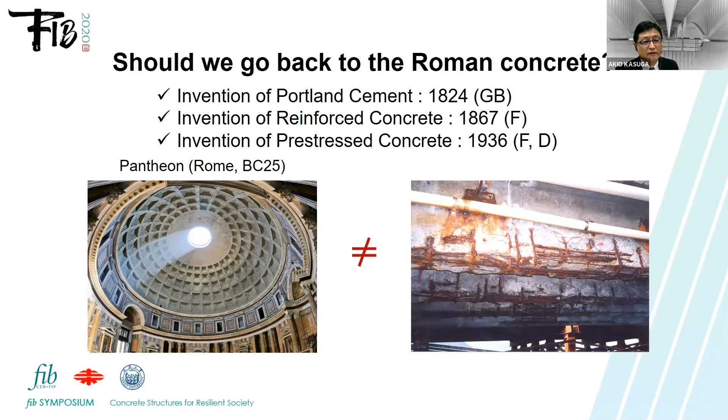So everybody knows what is different between the Roman Pantheon and present concrete structures. Roman concrete has no steel reinforcement, so the shape of the structure is only dome and arch. But about 150 years ago in France, reinforced concrete was invented, and around 85 years ago, prestressed concrete technology was invented too. But at the same time, we have the problem of deterioration of the steel reinforcement, like the photos on the right-hand side. So many engineers and researchers have been fighting this deterioration to solve the problem.

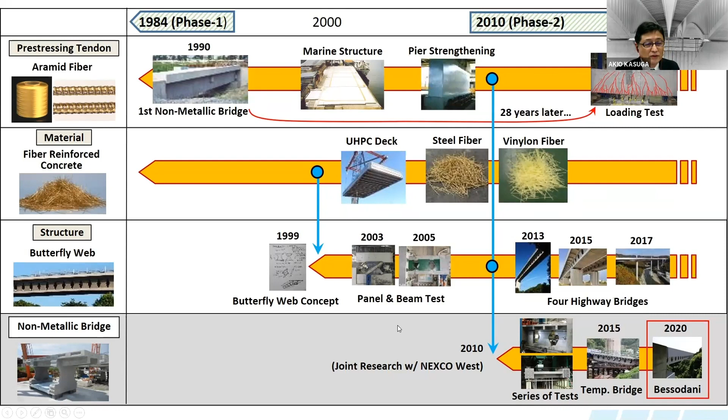So this is the roadmap of our long development of the non-metallic bridge. We first started at the end of the 80s, and at that time we developed non-metallic bridges for the Maglev train. We stopped during this area because of the cost, and also new technologies came, both materials and structures. Finally, now we have been doing joint research with the highway company.

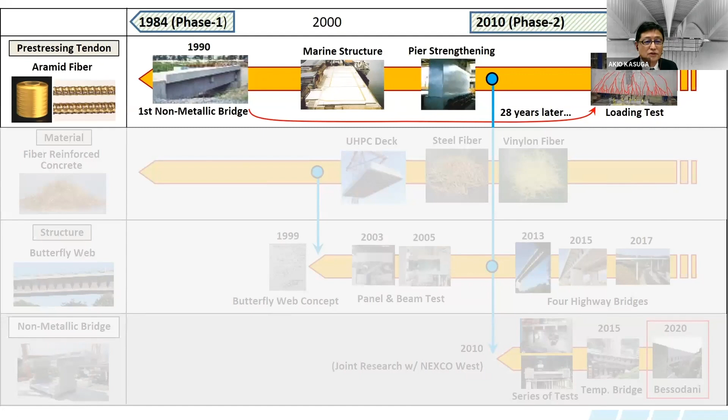So this is the first generation non-metallic bridge, from 1984. I call this the first generation. We built the private non-metallic bridge in 1990, and also used some aramid fiber in marine structures and pier strengthening. I'll show you later we just confirmed the strength of the 28-year-old structures.

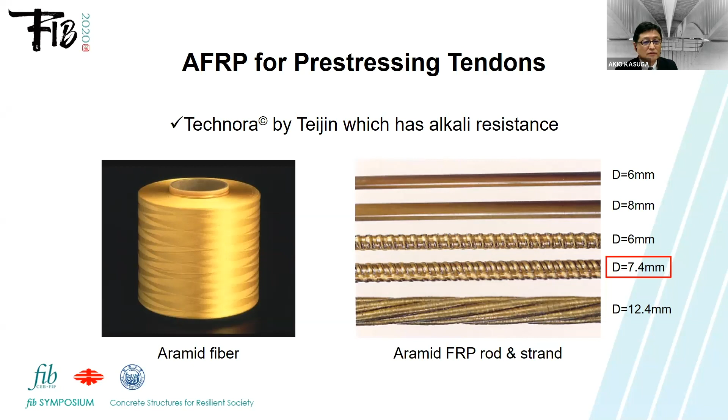As I said before, we focused on aramid fiber reinforcement as a prestressing tendon in the concrete. This is Technora by Teijin, a Japanese company, which has very strong alkali resistance. So we chose this material instead of carbon, since at that time carbon and aramid were available as new materials for concrete reinforcement.

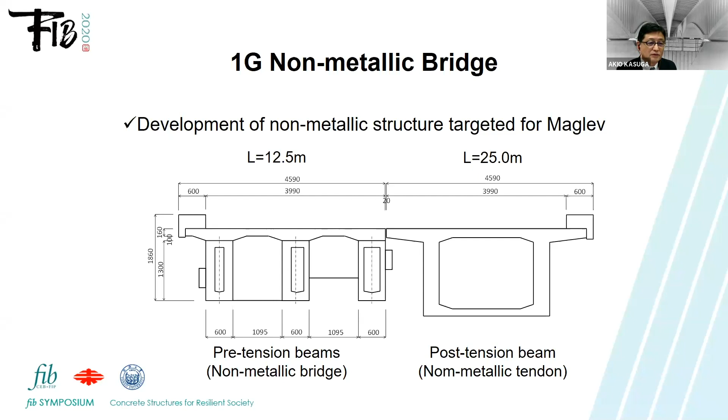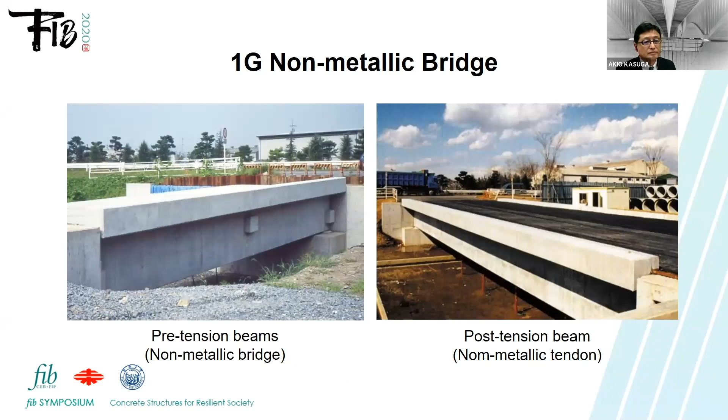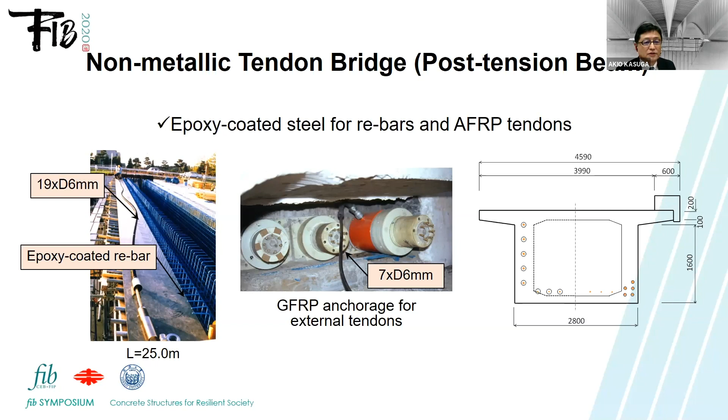For the pretension anchorage, we use a temporary steel anchorage system like this. It's very simple - we use a steel pipe, and inside the steel pipe we grouted non-shrink mortar to get bond stress for the aramid fiber reinforcement. But this is temporary, and we cannot use it multiple times - it's used only once.

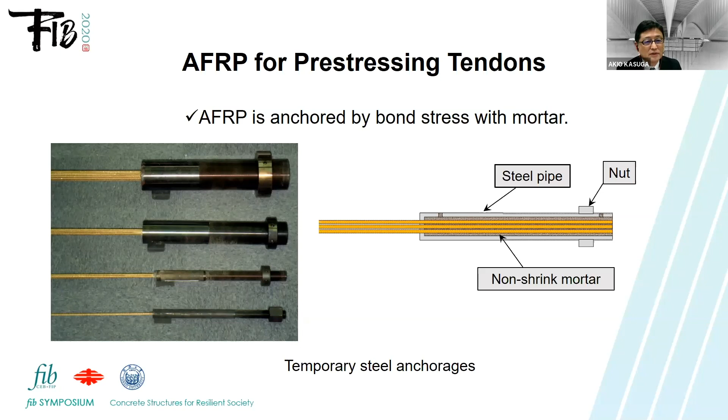The pretension beam is completely non-metallic. We use aramid fiber tendons, and at the same time aramid rebars, 8 millimeters longitudinally, with the same for stirrups. This aramid fiber reinforcement is very, very expensive because we have to bend it, and it also requires very special manufacturing before construction.

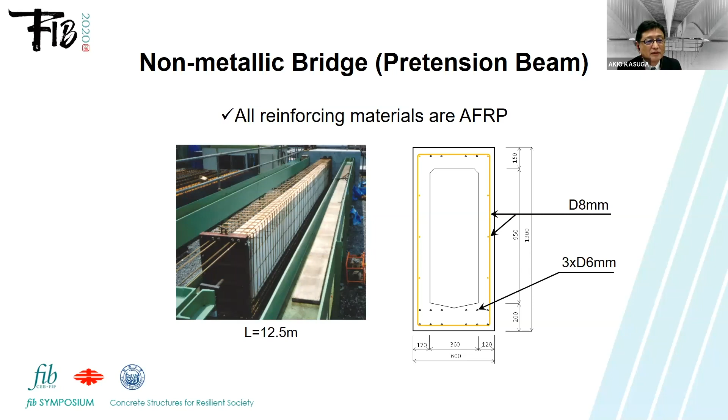At that time, the cost of these non-metallic technologies was 2.5 times the usual initial cost of prestressing beams. So we gave up continuing this first generation non-metallic bridge, and this project was suspended at that moment.

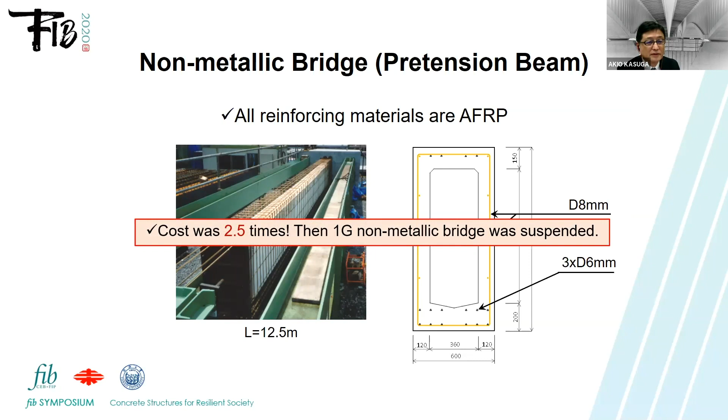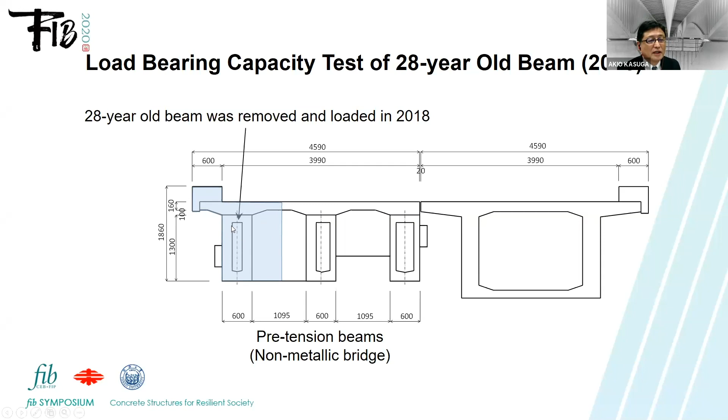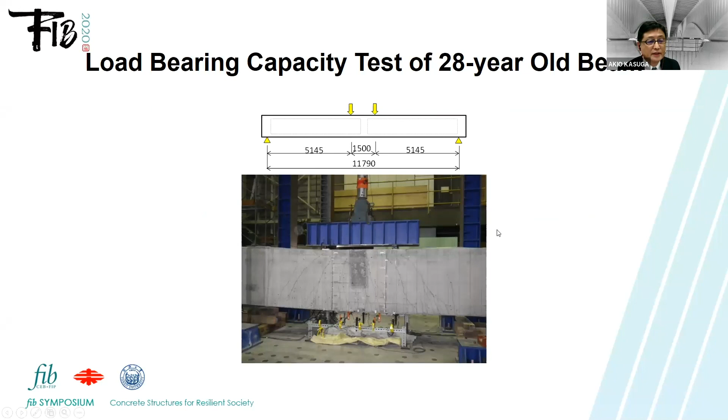So after the stories, in 2018, we cut one of the pretension beams on the left-hand side, this one. This is 28 years old. We confirmed the strength of this short beam in our laboratories with a very simple bending test, and confirmed that compared with the original design, the test results are almost the same, even though it is 28 years old.

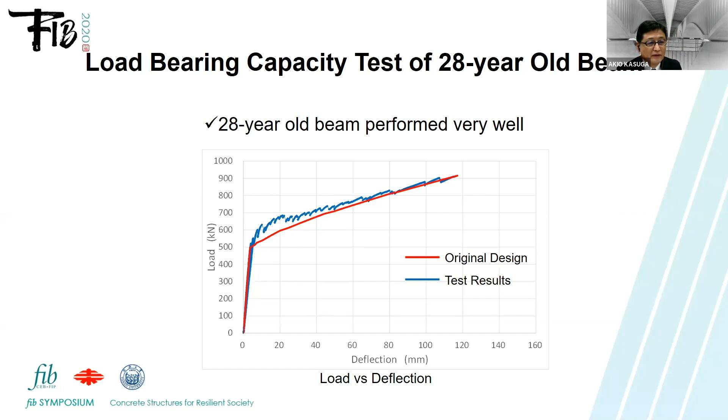So we have another 2 beams. I told the engineers, you should check in 2040, you should check in 2090. And instead of the old non-metallic bridge beam, as I told you in the last part of my presentation, we built the new material: zero cement concrete plus aramid fiber reinforcement. This is the new generation's technology. So 2040 maybe I will arrive, but 2090 I don't know.

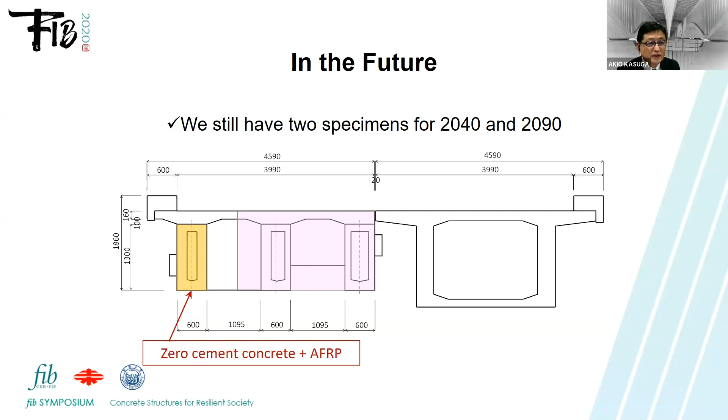But up to 2090, it's going to be 100 years old. So we confirm the durability of the plastic fibers in 2090 by using a real model.

Okay, after the suspending of the first generation, the new structure came, which is the butterfly bridge from 2001. This helped a lot for going to the next generation.

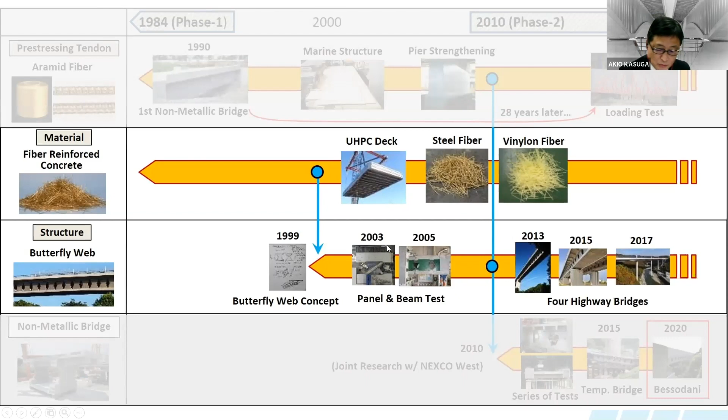So around 2000, we had very good materials, fiber reinforced concrete, in the practical field. From 2000 up to 2013, we built the very new butterfly web structure, which leads to a lighter superstructure to reduce the concrete, because this kind of new concrete is expensive, more expensive than ordinary concrete material. I'll show you the detail.

In 1999, I drew the sketch like this. It is the conceptual design of a butterfly web. And in 2001, it was patented, only in Japan.

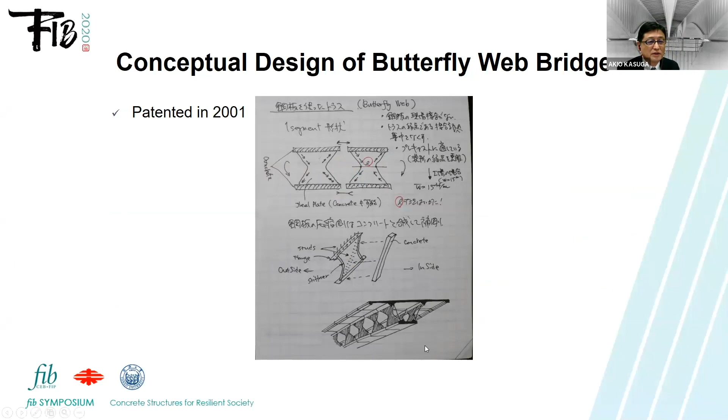The butterfly structure behaves the same as the double Warren truss, like this. So with the double Warren truss, we built many composite structures with steel diagonal and concrete deck, but the force is concentrated on the node, so the node detail is very complicated.

But instead of the truss diagonal, we just take the diagonal to the panel of the butterfly shape. So in the concrete, the compression zone is okay, but in the tension zone we put in some prestressing tendons to reinforce the concrete structure. Also, the horizontal shear force is distributed along the longitudinal direction. So the detail between this butterfly panel and concrete deck is not so complicated.

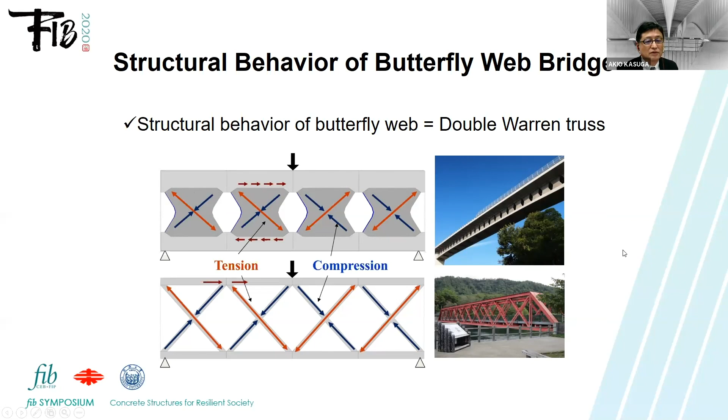After the concept of the butterfly web, at that time the first panel was steel. I presented this in a paper at the 2006 fib Congress. At that time the butterfly was steel. We did the test in 2003, and then did a beam test in 2005 — also with the steel plate.

But in 2006, we did the concrete panel, and I presented this in the 2010 FIB Congress in Washington, D.C. At that time, UHPC was available for the practical field. We checked the same things as with the steel panel.

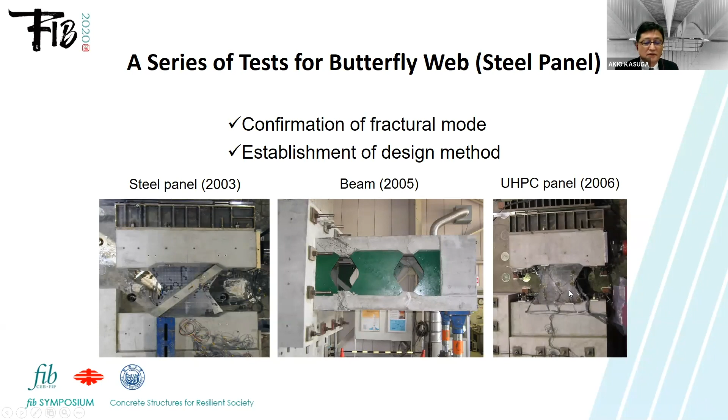This is the mix proportion of the high performance concrete. The compressive strength is 80 MPa, not so high — it's not a special concrete base. This is the fiber used; the tensile strength is more than 2000 Newtons per square millimeter, which is used in UHPC.

The fiber content is only 0.5% by volume. The diameter of the fiber is 0.2mm and the length is 22 millimeters. This steel fiber comes from radial tire fiber, so it's also not a special material — we can procure it anywhere in the world where there are tire factories.

And this is the mix proportion — we use 630 kilograms of cement. As you can see, there is no special material involved.

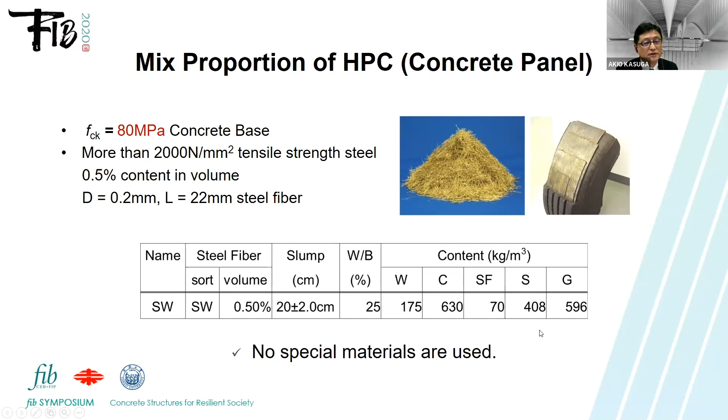In order to get the strength of the structure, we use the fiber as I said before, along with pretensioning and post-tensioning of the beam. This is a base of 400 plain concrete, and after putting in the steel wire, the strength is around 700. After tensioning of the beam, the total strength of this structure is more than 1,000 — compared with plain concrete, that's 2.5 times.

So after that, we confirmed that this material can be used in real structures.

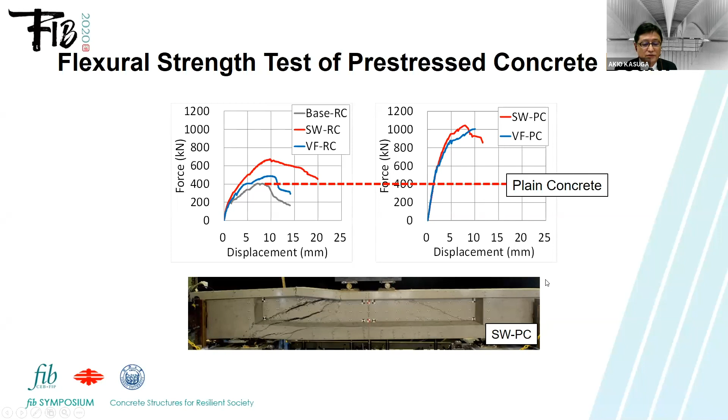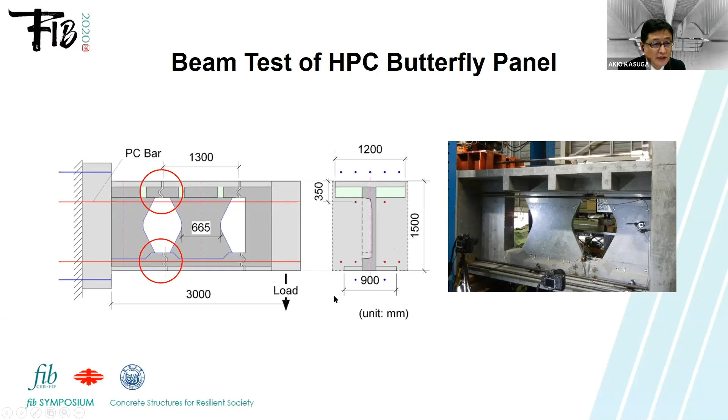So the final confirmation point is the connection between the deck and the gap between the butterfly panel, here and here. To confirm the behavior using the present specifications, we did a test using a half-size cantilever model. This is a check of the design value, SLS, dead load and ultimate load, and this is the checkpoint of the specifications. The ultimate load is almost the same as the design value, so we confirm that we can use the present specifications at the connection point for these special technologies.

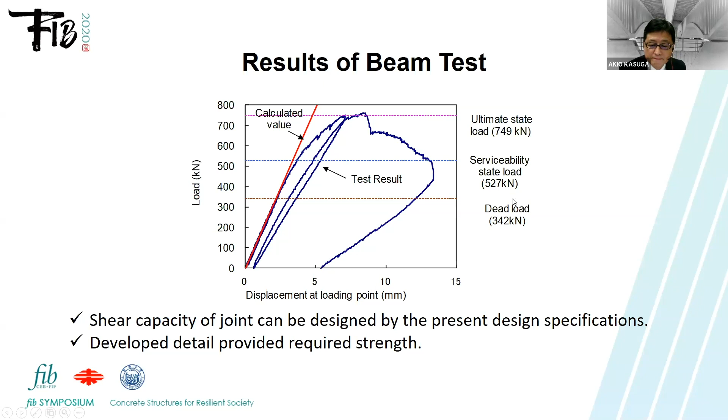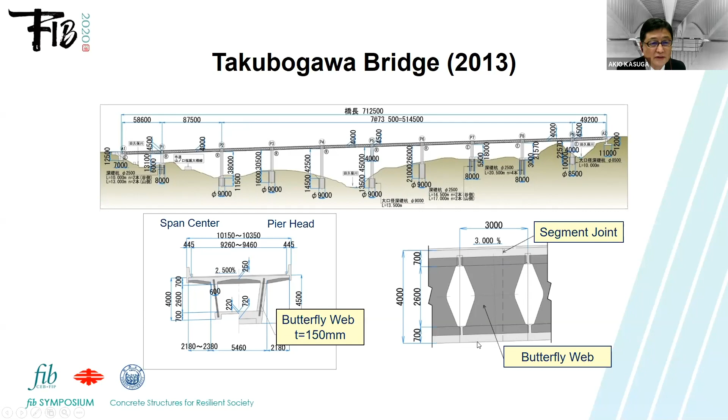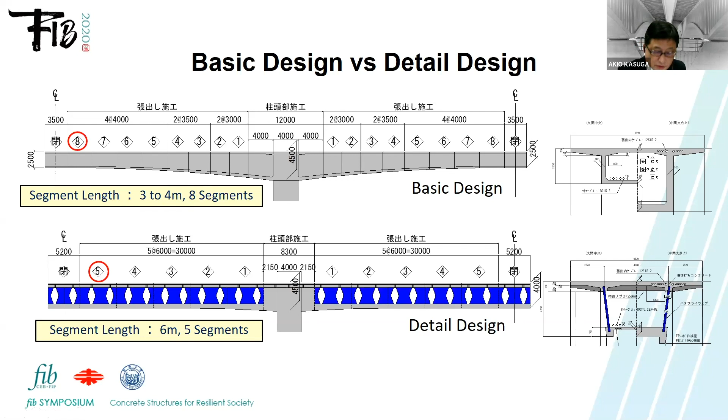This is a highway project, so the contractor like us should do the detailed design. This is the basic design by the consultant, and this is the detailed design by us. After applying the butterfly technologies, we can reduce the number of segments from 8 to 5 because of the lighter superstructure, with each segment length being 6 meters. But with the conventional ordinary box girder type, the segment length is 3 to 4 meters. This is the reason why we can reduce the number of segments from 8 to 5, which means we can shorten the construction time. For the contractor, this is very good.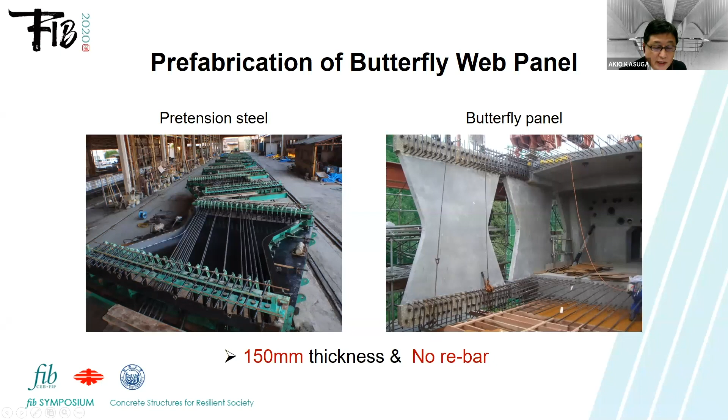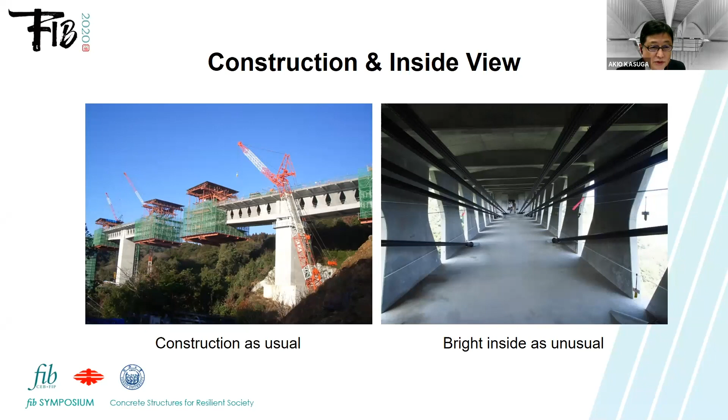This is the construction as usual. The free cantilever method with the form traveler is completely the same as an ordinary box girder type, but the inside on the right hand side is unusually light. The maintenance highway people are very happy because it's easy to inspect without needing lighting devices, meaning maintenance is much easier than with a conventional ordinary box girder. This is the photo after completion.

After that, including under construction, we have 6 butterfly bridges. This is a non-metallic butterfly bridge, and this one is under construction. This non-metallic bridge is completed this year.

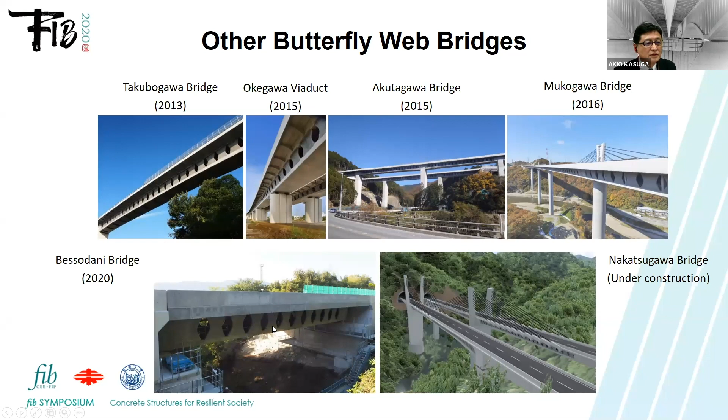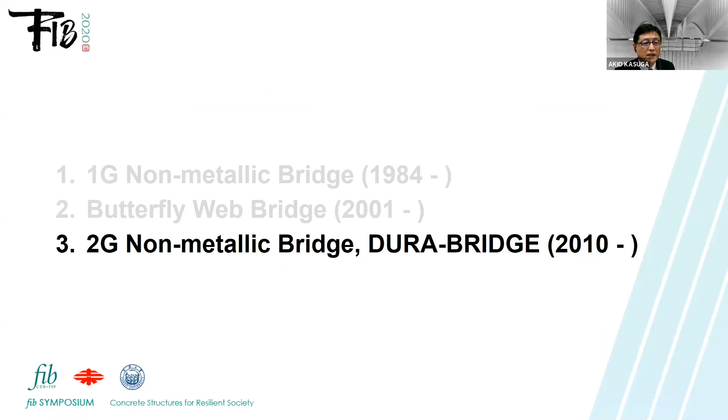This is the structure for the non-metallic second generation. After the development of the butterfly bridge, the second generation non-metallic bridge came about because NEXCO West, one of the Japanese highway companies, announced a joint research program regarding non-metallic structures in 2010. We applied for this announcement and were awarded the joint research, which is still continuing after the Bessodani Bridge in 2020.

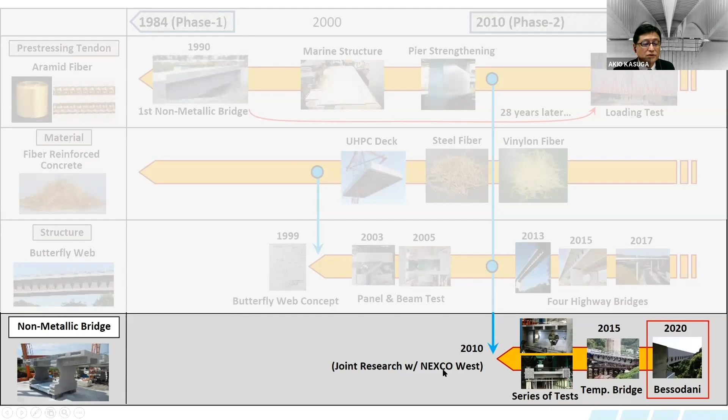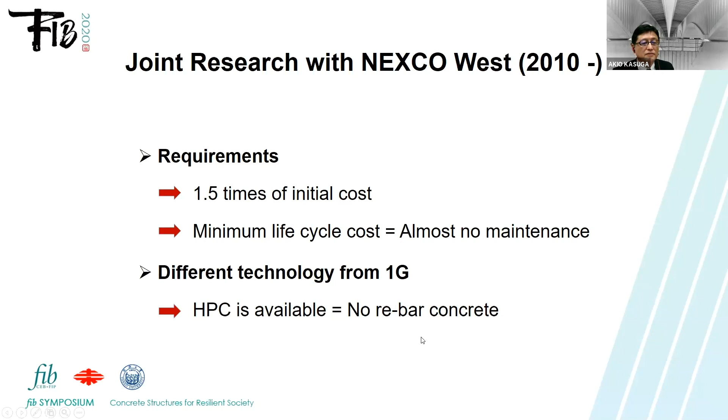The next step is the non-metallic precast slab. The requirement of the joint research was 1.5 times the initial cost compared with an ordinary type bridge, while also achieving minimum life cycle cost, meaning almost no maintenance on the bridge structure itself. A further difference from the first generation is that HPC, high performance concrete, is available, which leads to non-rebar concrete, as shown later. This is a big difference from the first generation, and this leads to the 1.5 times cost target with these new technologies.

So this is the outline of the second generation non-metallic bridge, which we call Dura-bridge. Precisely speaking, we use steel fiber, so it's not 100% non-metallic, but this is a short fiber, no problem in the concrete structure, quite different from reinforcing bars. The highway company allowed the use of steel fiber, and the tendon is aramid fiber, the same as the first generation. We use this type of aramid deformed rod instead of a strand like this.

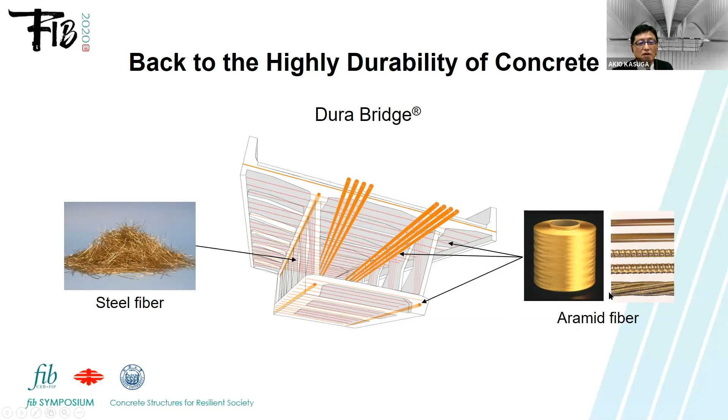In an ordinary girder we use steel reinforcement and steel prestressing tendons, but in the next generation we use only aramid fiber tendons. This is very simple and also avoids deterioration materials inside the concrete.

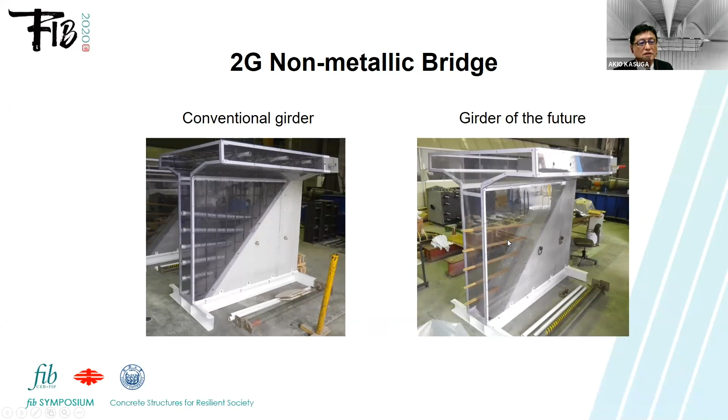In order to build the highway, which is box girder type, we confirmed some points in the laboratories. For the fabrication of the non-metallic bridges, firstly the web is fabricated, and after that the top slab and bottom slab are fabricated. We have a pocket to connect with the top slab, and this is the location to connect the horizontal ribs that stiffen the deck of the structure. This detail is very important, so we have to confirm the long-term behavior.

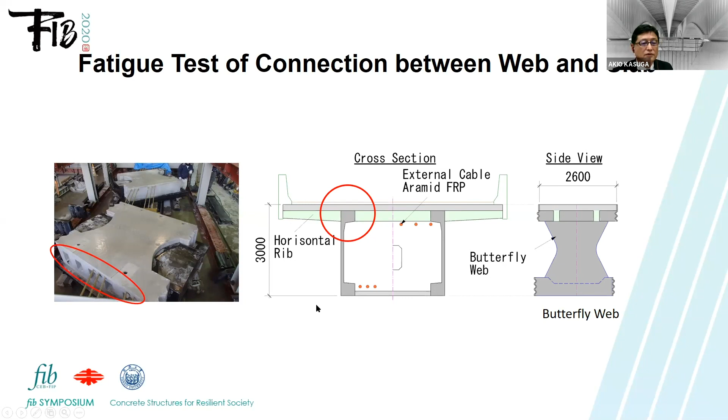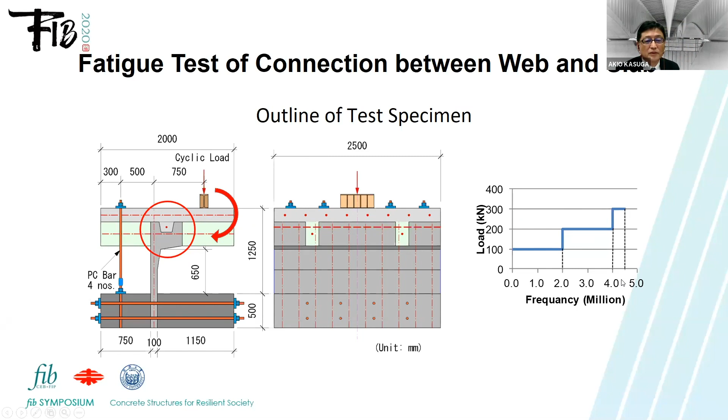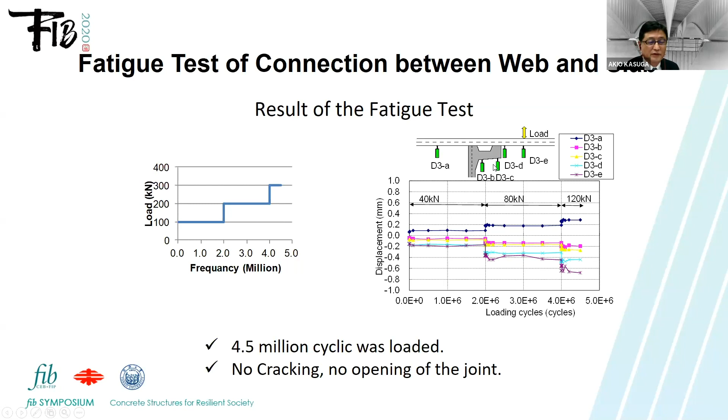This is a connection detail. We have a pocket here, and we arrange the aramid fiber this way, and this way, and this way. In order to confirm the fatigue durability, we used cyclic loading here, from 100 kilonewton to 200, up to 300, about 4.5 million times. This is the result: up to 4.5 million cycles were loaded, and no cracking and no opening of the joint was confirmed. We confirmed that this detail is okay for the real structure.

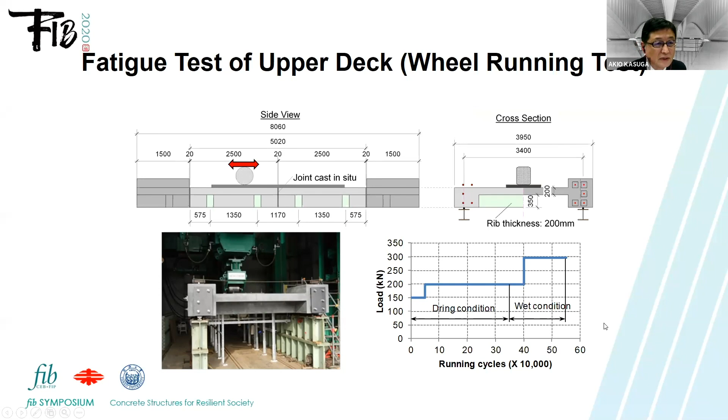Also, a highway company asked us to confirm the fatigue test using a wheel running like this. They have a regulation to check the durability of the slab from 150, 200, up to 300, about 500,000 times. From here, this is dry condition. From here, the wet condition is still needed to check the durability of this deck. So I hope this works well.

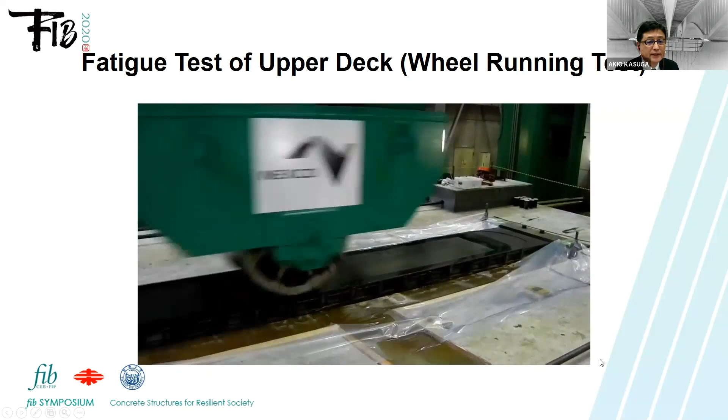This is a special test, using equipment owned by the highway company. This is the result of the wheel running test. The deformation is constant after the wet conditions. So finally, no crack, no opening of the joint, and no damage after this, which is equivalent to 100-year loading. So this new technology has performance the same as the conventional ordinary prestressed concrete deck slab.

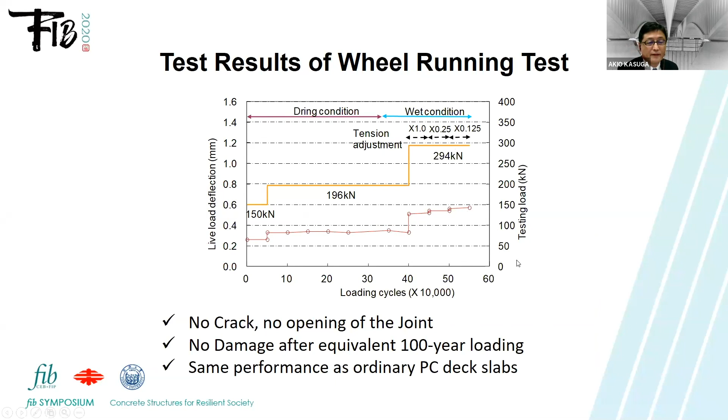After that, we tried to build a pilot project. This is a temporary bridge for 2 years. The span length is only 14 meters, but every segment and also tendon size is the same as the real size. We check the behavior during the 2 years, and confirm the next step will be the real bridges on the highway.

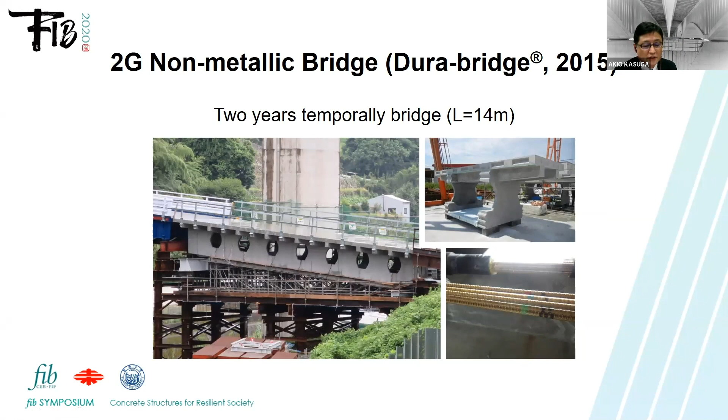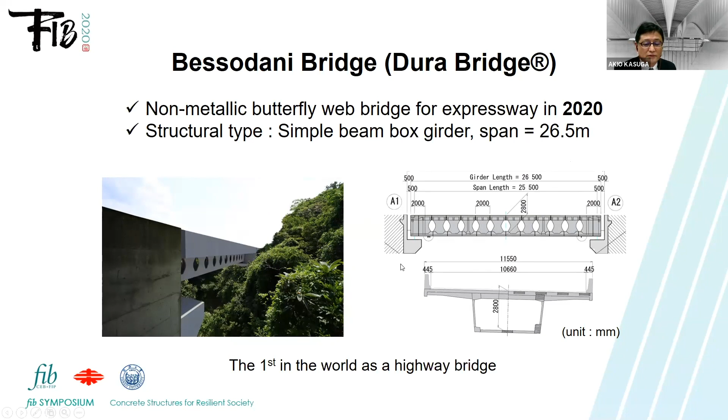This is Bessodani Bridge in Shikoku, Tokushima Prefecture. It is a highway bridge, and the span length is only 26.5 meters, just completed this September. It's a simple beam, and every segment was fabricated in our concrete factories. The Bessodani Bridge is the first in the world as a highway non-metallic bridge. This is the construction, and each segment has less than 30 tons.

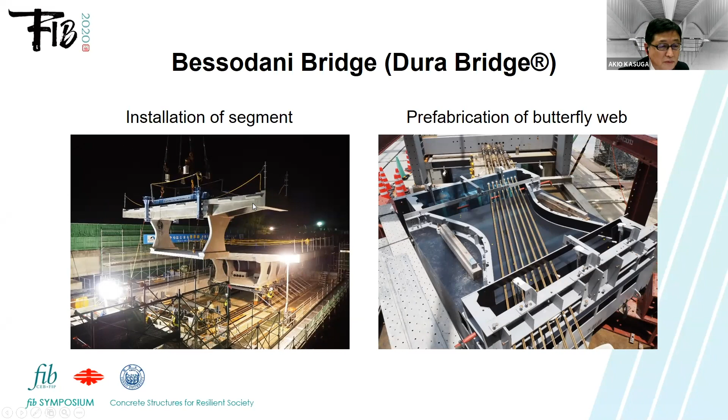This is a regulation of the Japanese transportation authorities. You can see these are aramid tendons, with no reinforcement inside of the butterfly panel. After this, we pour the fiber reinforced concrete. This is the same as the pilot project: the butterfly part is constructed first, and also the bottom slab and top slab casting in the factory.

Of course, we use a non-metallic concrete barrier. In this case, we use glass fiber rods to connect to the bridge deck. Each part is also fabricated in our concrete factories. You can see we have the GFRP rebars like this and this one. We just inject the non-shrink mortar between the bridge deck and the barrier. It is very easy to construct.

But in this case, this concrete barrier is completely 100% non-metallic. Instead of steel fiber, we use a vinylon fiber because the concrete deck is in a very, very severe condition. In Japan, we use de-icing salt during winter on the highway, so in order to avoid any possibility of deterioration, we completely remove this risk by switching from steel fiber to vinylon.

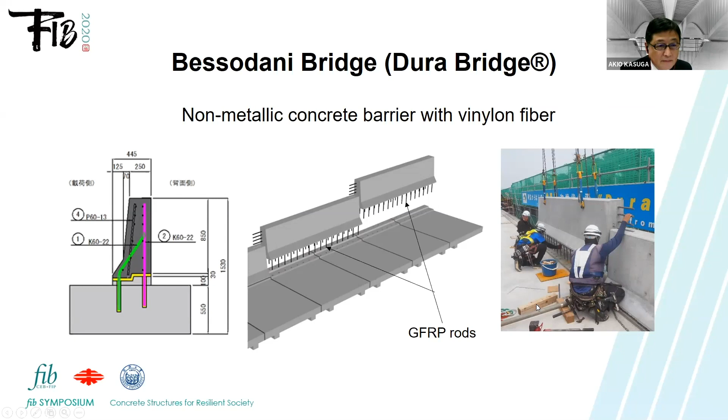Also, as I said before, the temporary prestressing for the pretension is only used once, which is one reason it costs more than the conventional technique. In this project, we developed a plastic wedge like this, through co-development with a plastic company. In this case, we use a steel pipe, and the wedge is plastic. We can use this wedge about 10 times, and we can reduce the cost in this project.

But now we are doing development to create a plastic female cone. This is somewhat difficult, but finally, we are focusing on the permanent plastic wedge and plastic female cones to anchor the plastic fiber in the near future.

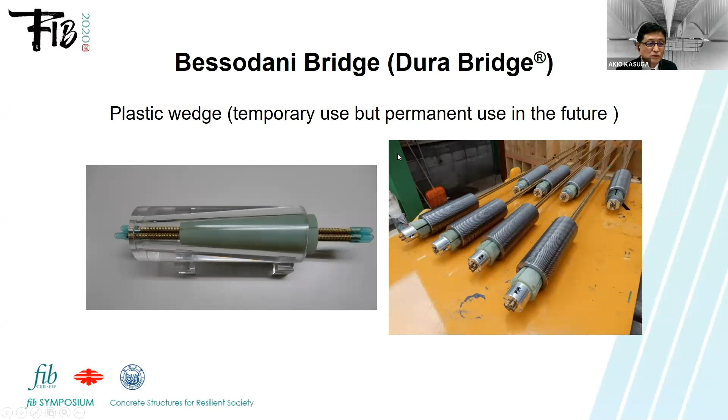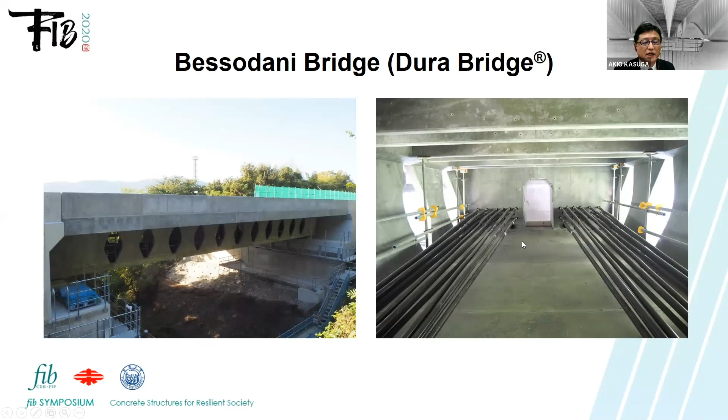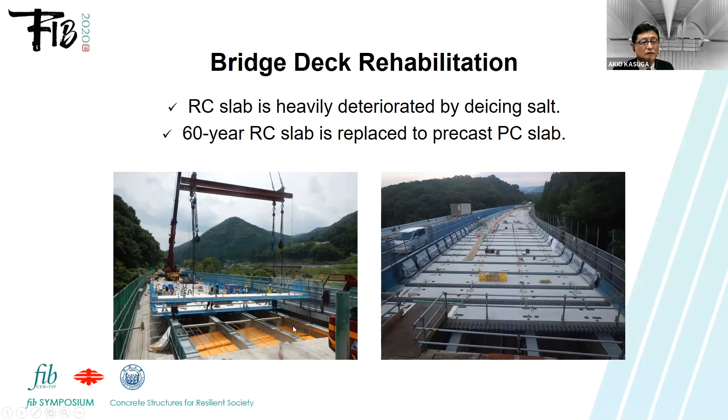So the next step is now under design. We have many rehabilitation programs for structures built 60 years ago, moving from reinforced concrete to precast concrete. In a special case, we use a non-metallic deck like this, in both the transverse and longitudinal directions. The tendon is also, of course, aramid fiber, and we have a very small joint like this.

We already finished the wheel running test with the Express Highway Company. It's under design, and next year we will build this new type non-metallic slab, Dura-slab, on the west side of Japan, on the Chugoku Highway Expressway.

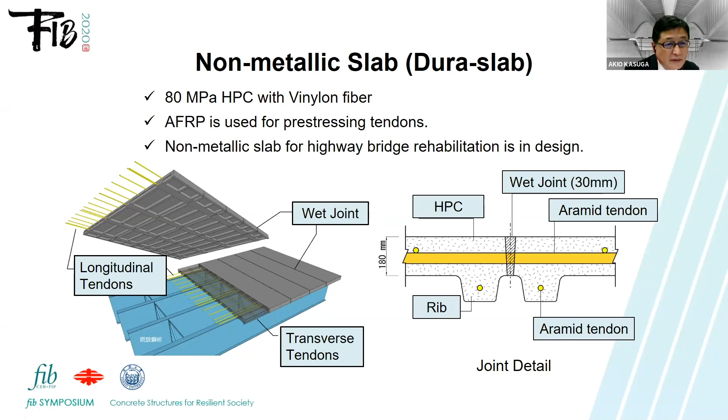We checked the life cycle cost. In this case it's almost half of ordinary concrete with ordinary steel reinforcement and steel tendons. This zero cement concrete is a very new material, and compared with ordinary concrete we can reduce CO2 by up to 70%.

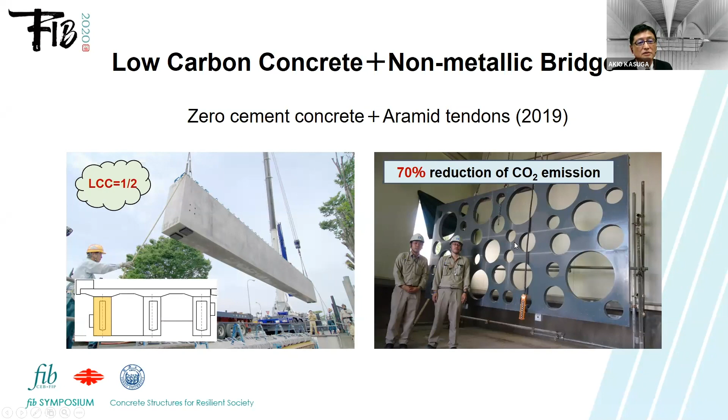So these are the characteristics of zero cement concrete. Our concrete can achieve about 150 MPa, very high strength, without steam curing. At the same time, the dry shrinkage is extremely small, around 100 micro, and the creep coefficient is about one-third compared with ordinary concrete.

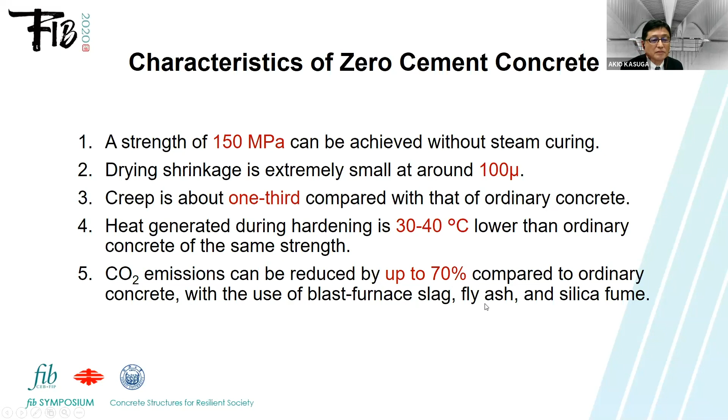At the same time, the heat generation during hardening is about 30 to 40 degrees centigrade, much lower than ordinary concrete. And as I said, CO2 emission can be reduced by up to 70% with zero cement concrete.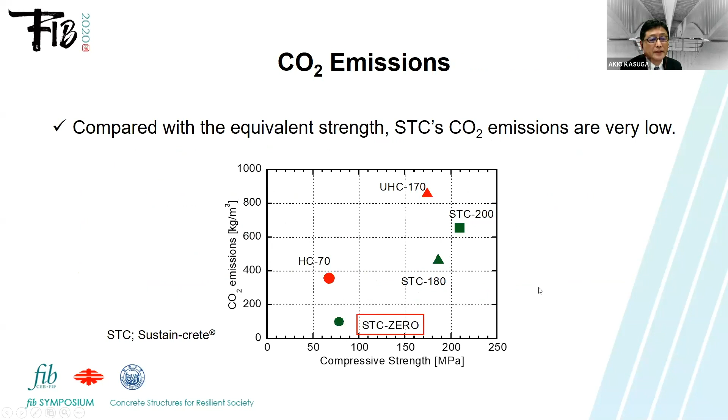At the same time, this concrete has very good characteristics, ultra-low shrinkage. This is the shrinkage of sustainable concrete, zero cement concrete, and ordinary concrete. The strength is around 70. Now this is the dry shrinkage... sorry, this is the dry shrinkage, and this is autogenous shrinkage.

Compare this type with this type, and also this type. The shrinkage is very, very low compared with ordinary concrete.

And the heat generation in summertime—concrete temperature normally rises up to around 70-80 degrees, but by using zero cement the temperature is less than 50. In wintertime, less than 30. This means no cracking during hardening and no cracking during curing, which means high durability of the concrete, not only reduced CO2 emission.

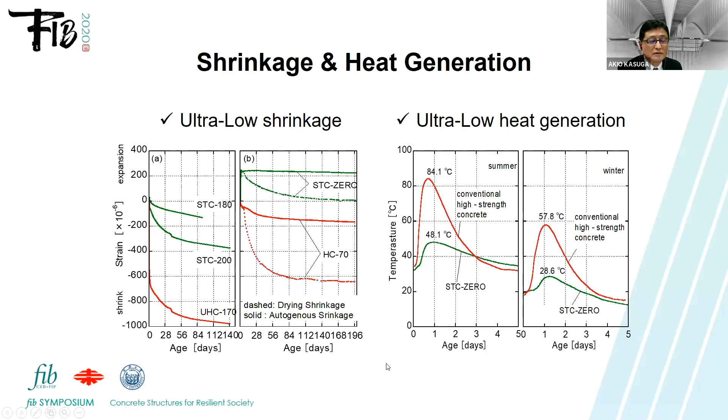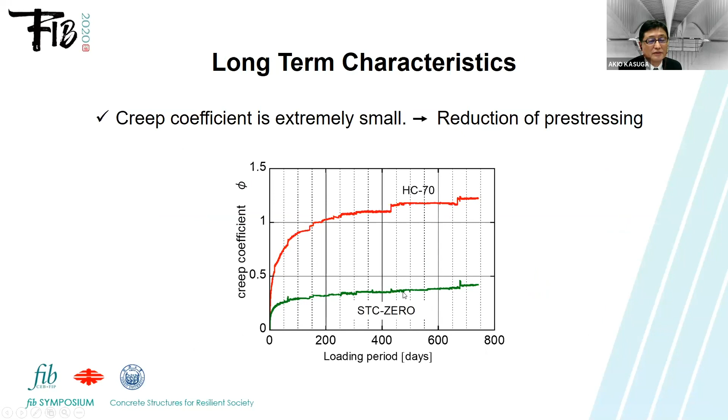The creep coefficient is around one-third, which means we can reduce the prestressing materials compared with the normal type.

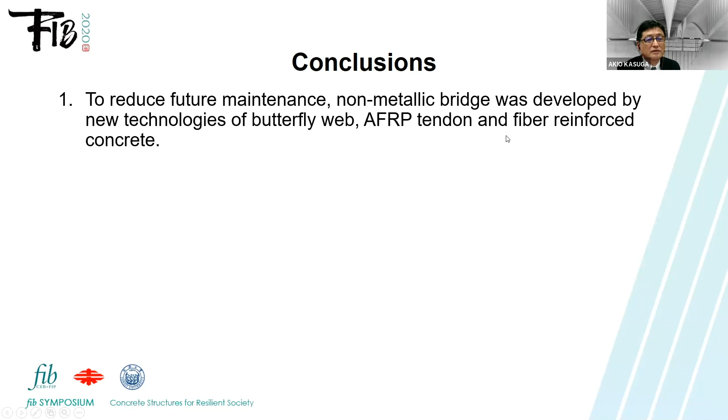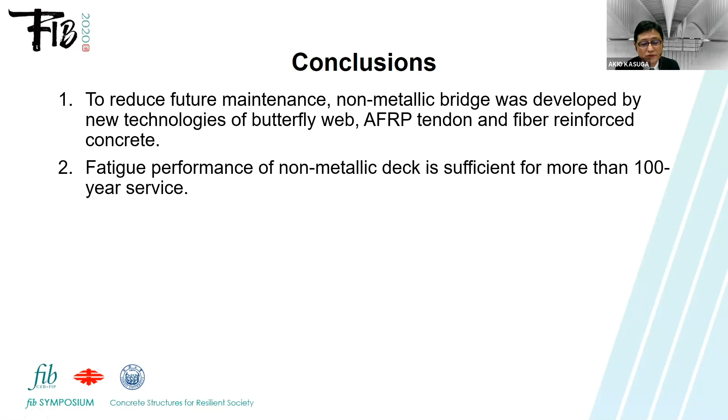Okay, let me conclude my presentation. To reduce future maintenance, the non-metallic bridge was developed, using new technology of butterfly web, aramid fiber-reinforced tendons, and fiber-reinforced concrete. Fatigue performance of the non-metallic deck is sufficient for more than 100 years of service, the same as present technology.

Non-metallic technologies with zero cement concrete make structures extremely durable and lead to minimum life cycle cost. These low carbon technologies lead to sustainable solutions. So the final conclusion, and my most important point: we, as concrete designers, engineers, and researchers, should first pursue low carbon technologies not only in materials but also in structures, construction, and demolition.

After the pandemic, the world has changed dramatically, as you know. As concrete users, we are heavy concrete consumers, and the cement industry itself is trying to reduce CO2 in the production process. But as concrete users, we have to summarize, launch, and present low carbon technologies, not only inside the members but also all over the world. So this is our next mission through this very, very complex situation.

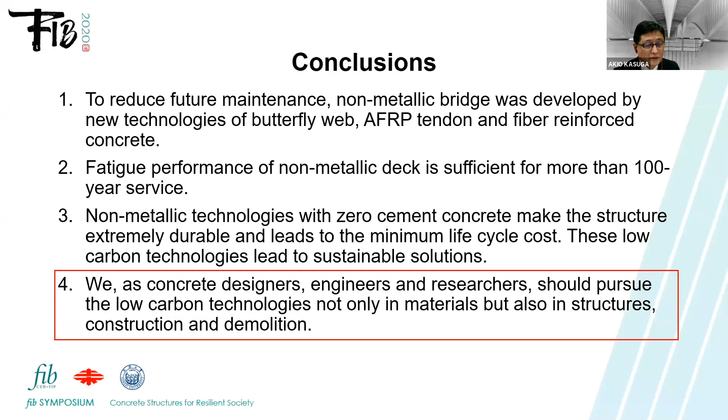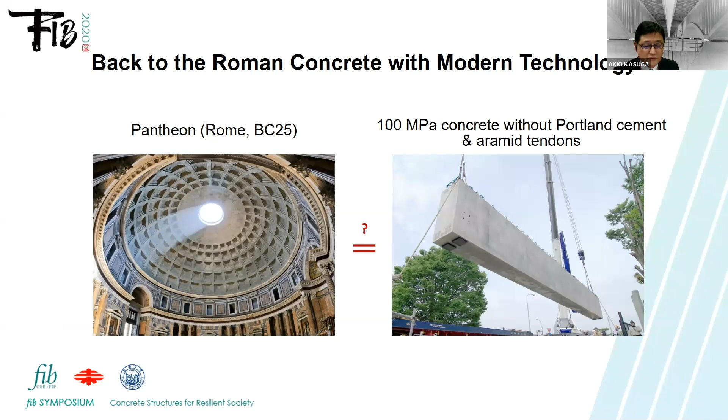Thank you very much for your excellent presentation, including new types of bridge designs, application of non-metallic reinforcement, and the application of new types of concrete, zero cement concrete, for the future. You have received a lot of messages and questions. I hope we can answer some of them, even if the time is just finished.